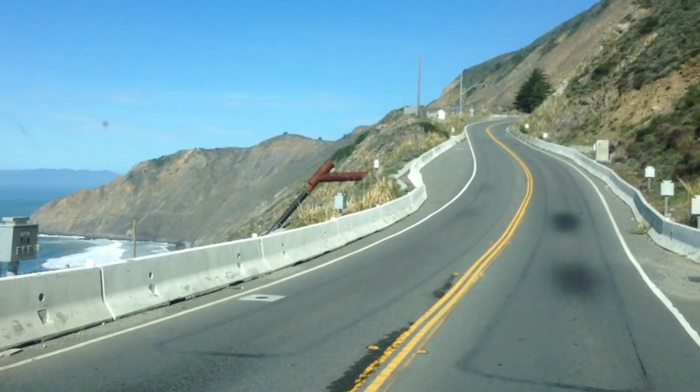I think just the county and the state in general, having this be a dependable roadway is going to be very important for us. It's important for recreation, it's important for the businesses, and it's important for our two communities that have been separated by this Devil's Slide for so long. Now they won't be.

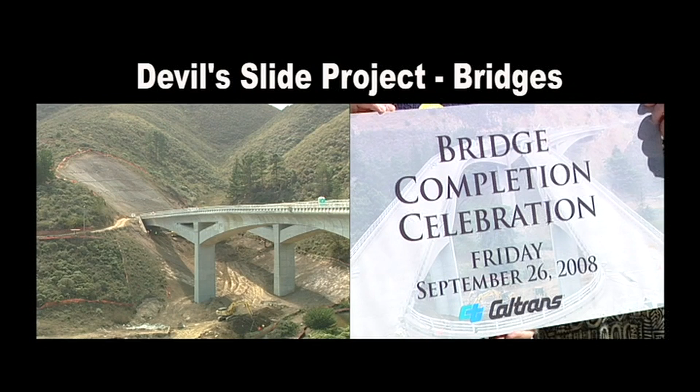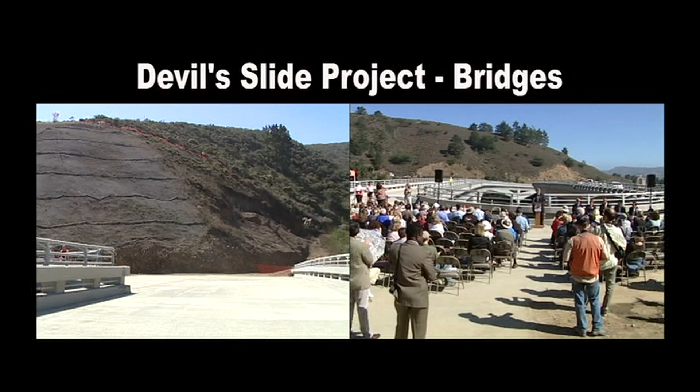In reflecting back in my design studio, what it was that I was trying to accomplish, what was the mandate from the Coastal Commission, they said that they wanted something simple, they wanted something that wasn't too loud, they wanted something that blended back into the mountainside, and basically that didn't disrupt the sensibilities of people as you went by, that it just was there and that was it.

People would avoid Devil's Slide. People that live on the coast, they really felt the road was dangerous. So that's how we feel. You can imagine how people outside the area feel. So I think by having a really good, safe route to the coast from San Francisco heading south, it's going to make things much easier for people to visit Pacifica, Half Moon Bay and south of us. So I think it's going to be a good thing for everybody on the coast.

The economic and tourism boost, it's just going to be a wonderful impact for us, very positive. We're looking at ourselves being called the gateway to the tunnel, if you will, from the north end, and it's going to attract more businesses coming to Pacifica because we will have a lot more tourists coming to Pacifica, and it will help all the visitor-serving businesses throughout Pacifica.

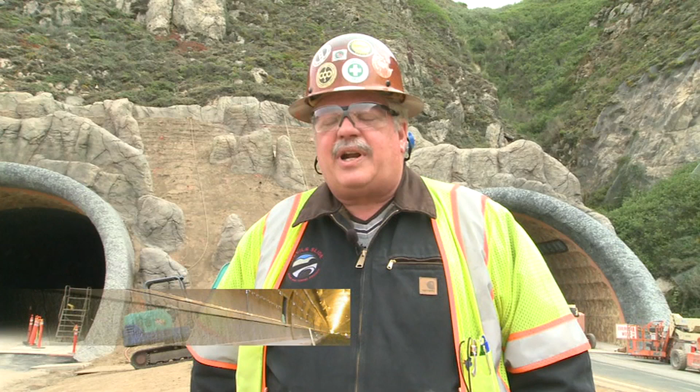We did not have any serious injuries because we worked very closely with Kiewit. That was in the form of a lot of pre-activity hazard identification methodologies, and we were able to identify those hazards and put in place safety procedures, precautions, equipment to help reduce, eliminate or prevent the accidents from occurring.

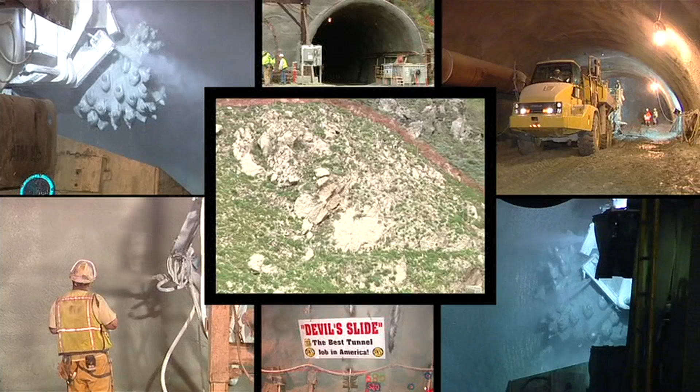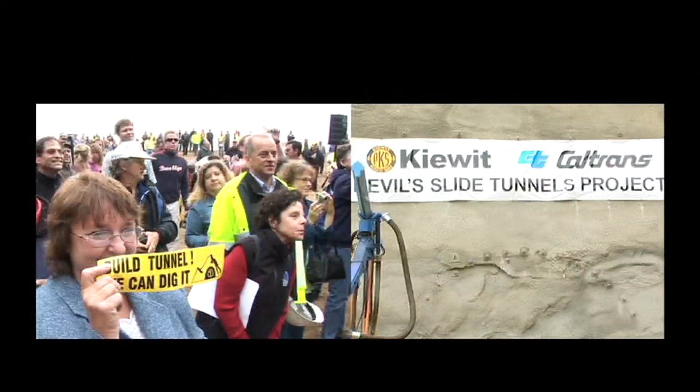Today we can all envision the beginning of the end to the disruption caused by landslides and road closings. A day worth celebrating. 4, 3, 2, 1. Let's dig it.

I think it was the day the voters approved Measure T. I think that was the really high point. It took the people of San Mateo County to speak up and say, we want a tunnel. And then everybody had to listen to that. We had to change our coastal plan, and Caltrans had to go to the drawing boards and design a tunnel from there. The other part that I think was really wonderful is that we became partners with Caltrans in this solution.

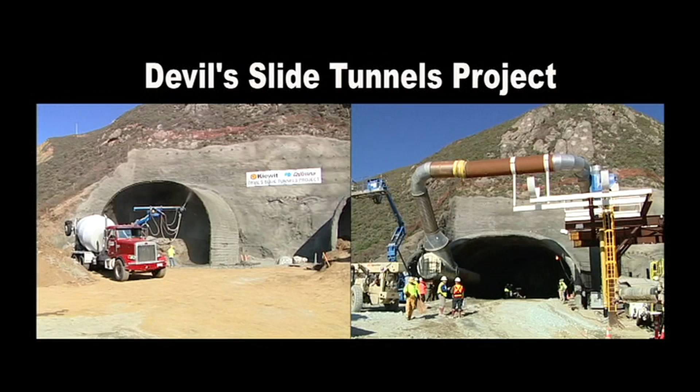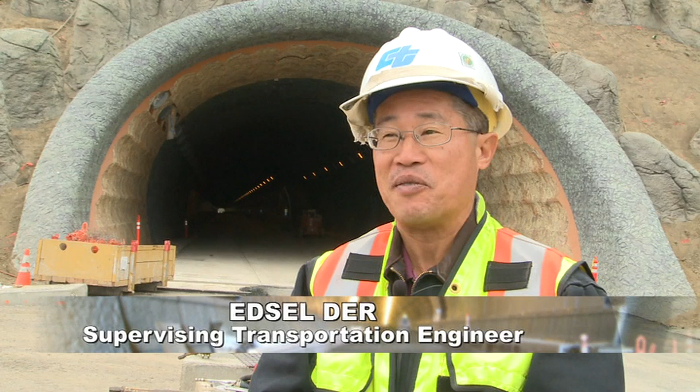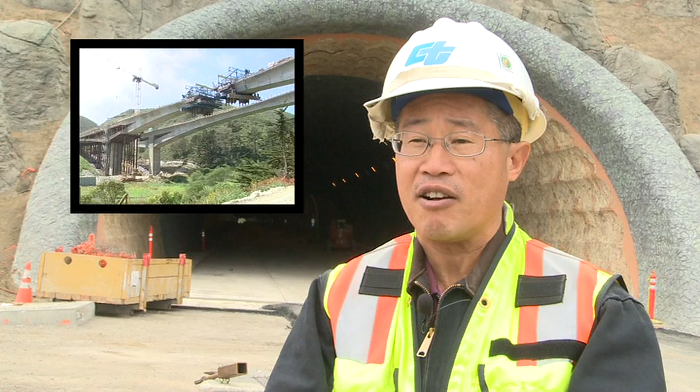This project is broken into 3 parts. We started the job with the South Rock cut, where we had to widen out a portion of Highway 1 to develop the laydown area for the future tunnel project. Our second project was constructing the cast-in-place segmental bridge over there at Shamrock. That also was designed with the mind to minimize impacts on the environment.

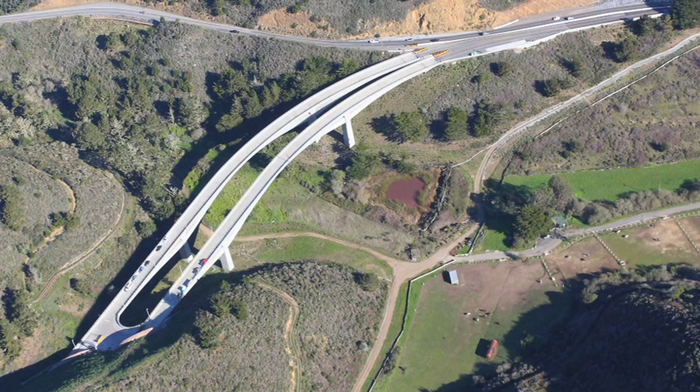Even though the biological opinion provides for an area of take, the department has not observed or recorded any take of the red-legged frog. I think that we have done a marvelous job. Our team of monitors are on site every day. They're checking the different construction activities. They're looking at the different areas where we could have conflict with the species. And we have numbers to actually show that the population has remained stable, not only at the North Pond, but adjacent ponds that we have in the facility.

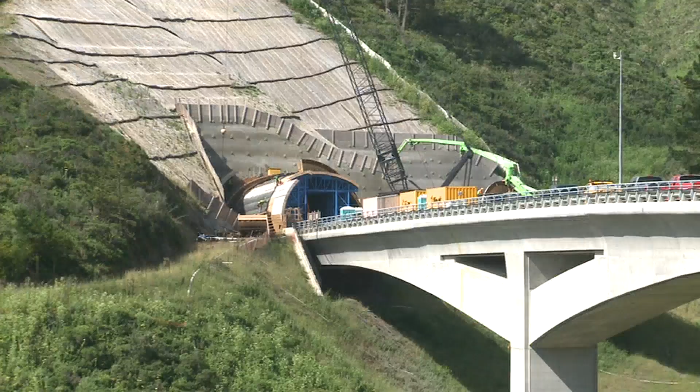So finally, when we worked on the tunnel project, starting in 2007, it was just a continuation of more of the environmental concerns, in addition to then working on building a tunnel, which we haven't done in over 40 years, using the new Austrian tunneling method to bore through the mountain here.

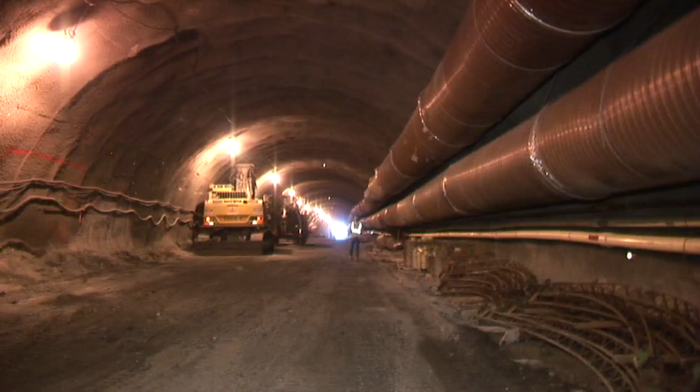The new Austrian tunnel method is a process by which we take little segments of the tunnel, we excavate a little bit into the tunnel, and then by moving into the tunnel, you are able to support the tunnel with initial support. So you basically improve the ground around the tunnel. In some cases where maybe you're in very hard rock, you may need to do very little. You may just need to shotcrete the rock.

As we're mining each individual round, we're determining the quality of the rock as we mine. And if the quality of the rock is better, the new Austrian tunneling method suggests that we don't need as much support in that tunnel as we might if the rock were of weaker quality. So as the quality gets better, we can mine a little more and support a little less, because we're allowing the rock to relax a little bit and gain strength as the mining progresses. And that's why we mine in 2 separate halves.

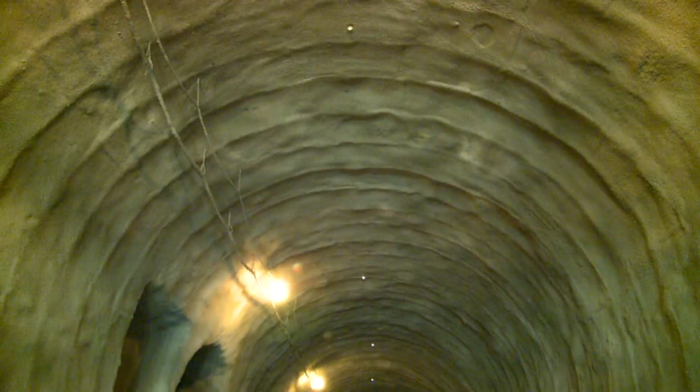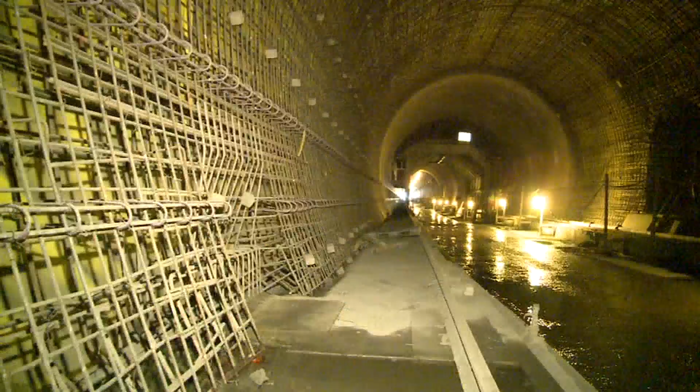The new Austrian tunneling method application also calls for, depending on the strength of the rock, the tunnel to be mined in two halves. We call that a top heading and a bench. That top heading is of a certain size, and that allows the rock to relax a little bit, and then at a later time we can come through and mine the bench, which allows the rock to relax a little more, and that opening gains strength, and then we'll come through with a final lining that'll be totally reinforced concrete.

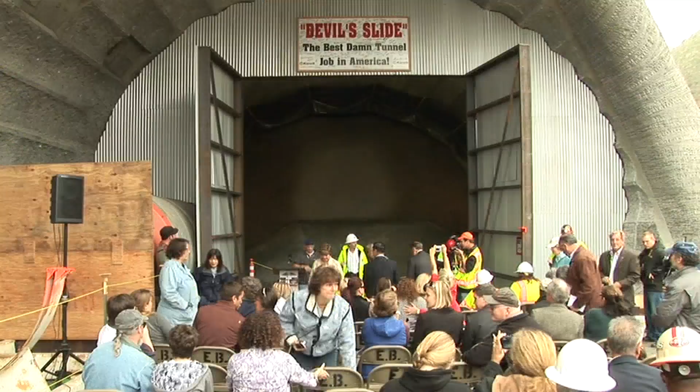I think one of the best days on the project here at Devil's Slide was the tunnel hole through at the North Portal, when we were actually able to celebrate with the community that we had finally broken on through to the other side.

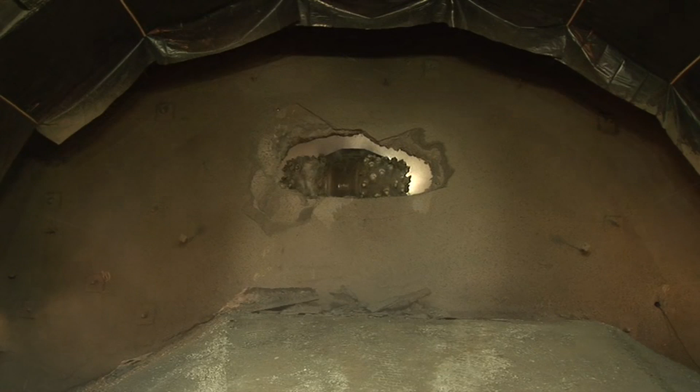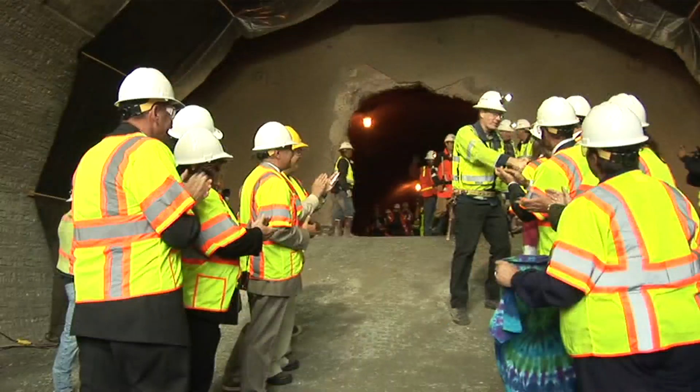It was a totally cool ceremony. I thought the best part was when they punched through and they knocked everything out, then all the guys in the tunnel, all the construction workers, walked out through the new opening, and then they got greeted by all the people that were sitting there.

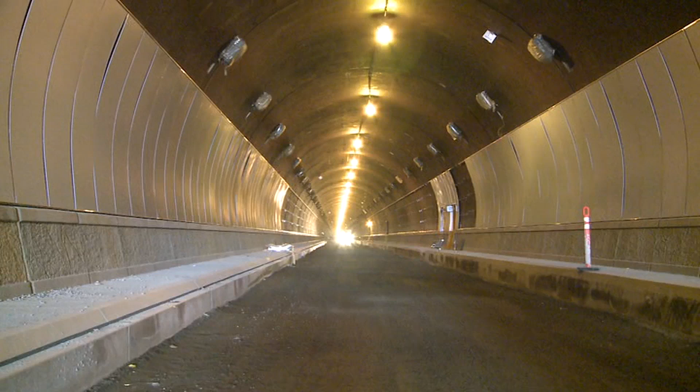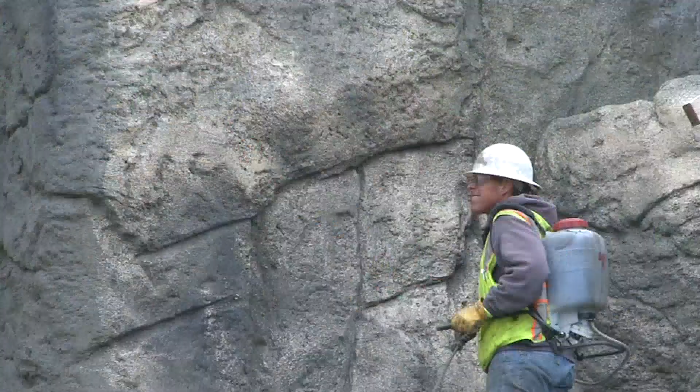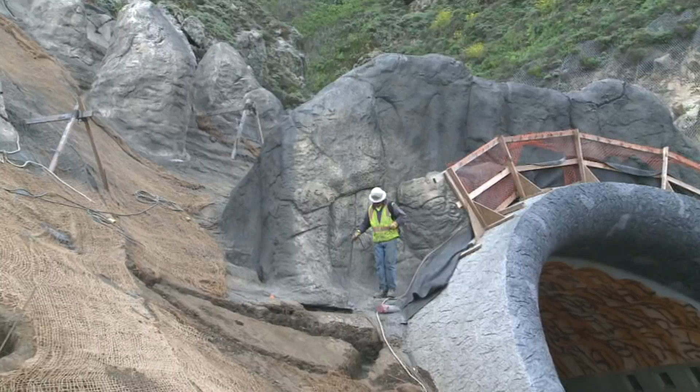Very, very impressed with the way the entries to the tunnel look. The south especially, because you're right up next to it. I haven't really had that opportunity yet with the north end, but it's beautifully done. The walls look like natural stone, and they're just beautifully done. The whole entry from the south and the north as well, but the south I've seen closer. It's just beautifully done. I was very impressed. This is a great achievement.

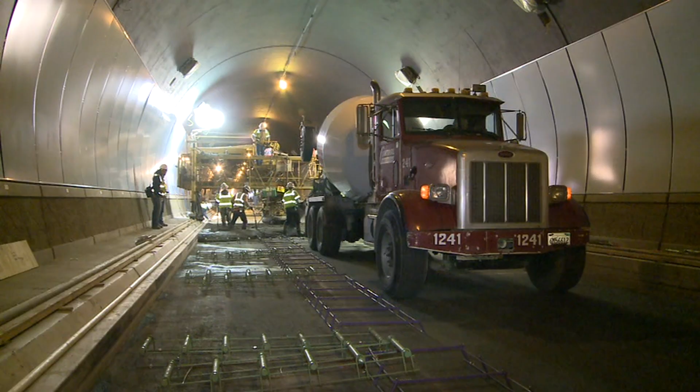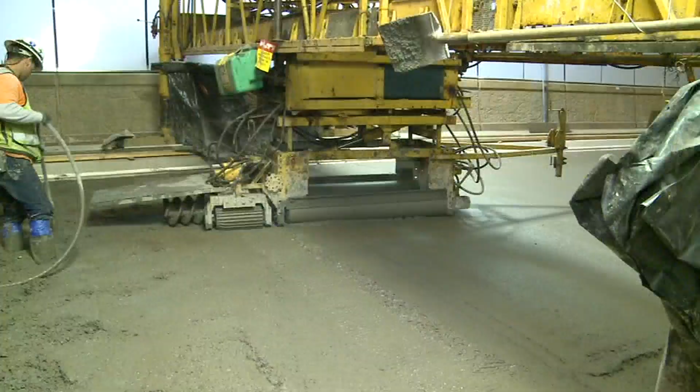This is a great addition to the infrastructure that we have in this region and in the Bay Area. I want to thank the community for their patience while we went through construction of this project. And I think the time we took in going through the environmental process, in the deliberation that we had, in the design of this work that was very collaborative, I think the end product is something that everyone, not just the coastal community, but the whole state needs to be proud of.

The Half Moon Bay Coastside Chamber of Commerce and Visitors Bureau is so excited that the tunnel is opening this week. All of the residents have waited a very, very long time to have this much safer entrance into our gorgeous coastside, and we congratulate Caltrans for a job well done.